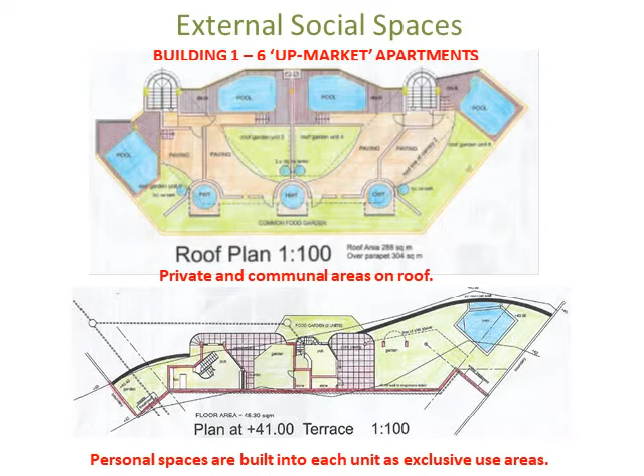If the space is there, it can be used. If the space isn't there and it's not designed in, it can never happen.

Looking at building number 2, 44 apartments, there are opportunities to do the same thing. This layout is maybe just designed for privacy and access for each of the units, but there's a small external planting area which is a private area, more to do with self-sufficiency in food, and that's dealt with in another video. This is a fairly standard layout, just designed to suit this particular development.

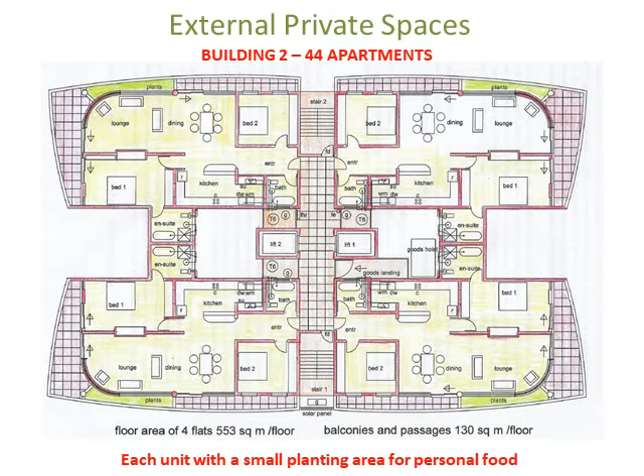But what opportunities are there in a block like this? There's plenty of opportunity. This block could have a complete floor that's just a communal floor, like a hotel lounge situation where people get to come down and interact with one another.

It could have an external space, an open veranda type space where people can go and sit, areas to catch the morning sun and the evening sun, quiet areas with a library and internet facilities, and social areas where people can sit around and chat, meet one another.

Putting that one extra floor in on a 13-14 story building costs some money, but this is what's necessary to achieve that goal, that objective, because without it, it's just another block of flats.

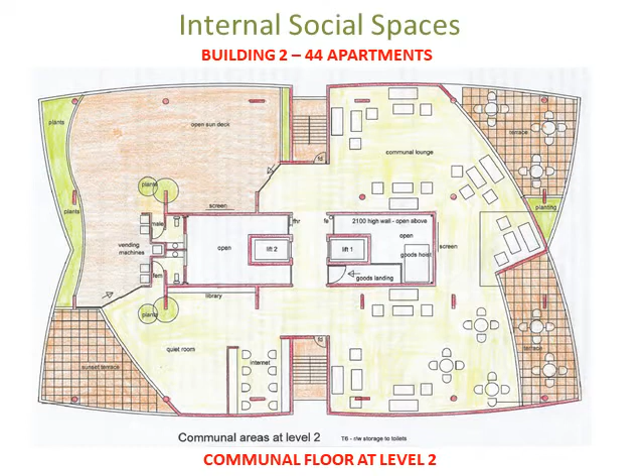Again, the roof area becomes an important area of opportunity. In this case we've got a creche where people come with their children, where the children can be taken care of while they're away, for security and safety, and also where people can meet.

There's a communal gym on the inside for people where they can come and interact with each other. That area of the site, with all the parking at the bottom, might not be conducive to having an outside gym, but there's no reason why you can't provide that facility on the inside.

Then there's a large open area where people can just get together and meet, with planting areas or a braai area, some communal toilet facilities and so on. The roof area becomes important and must be looked at as a social space, not as a covering for the building. It's a different concept.

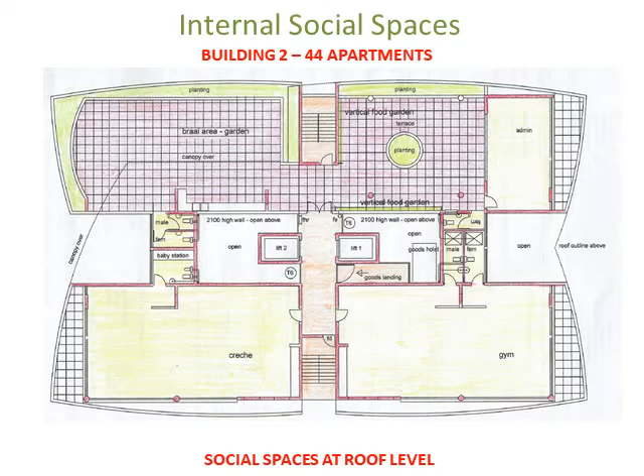Looking at building 3, a subsidized building for low income owners, the roof space is the same. It's got great opportunity for a gym, a playground area for children, a creche, an open leisure garden, and a laundry where people can use it not only for function but also for getting together and interaction.

In the body of the building itself, at each floor, in the core space of the building where people from both areas will come to, there can be a communal center there, a communal building that can be used by all of the owners.

That could be at every level, and that space can be designed specifically for purposes decided by all of those owners together.

This building would have 48 flats, 8 flats per floor, 6 floors, and 3 or 4 communal areas built right into the structure in a convenient place. There's nothing to stop this from happening.

The only thing that prohibits it now is budgetary and financial, because developers want profit and they're not really interested in that in the long term. They build it, take the money and move on. It's not about that anymore. It can't be about that anymore.

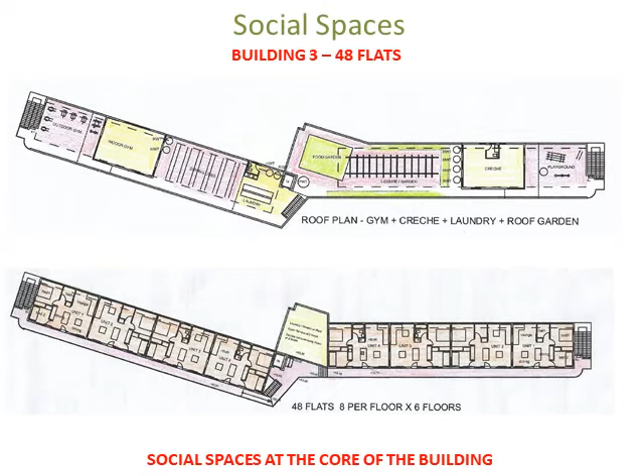A larger view at that core area shows it could be on the roof. There's your laundry and your roof garden. As you come down the building, there could be two levels with open terraces where people could come and sit and enjoy an open space, looking out over the view, and maybe two double volume areas for community rooms at different levels. It can be designed to suit the overall function of the building. But these spaces are accessible to all the owners in the building.

And in this instance, for the low-income building, I would say that rentals shouldn't be permitted in that building, just for owners, because we know what happens with tenants. Tenants come, they don't respect these kind of spaces. So this is about developing a quality of life for the people that own these buildings.

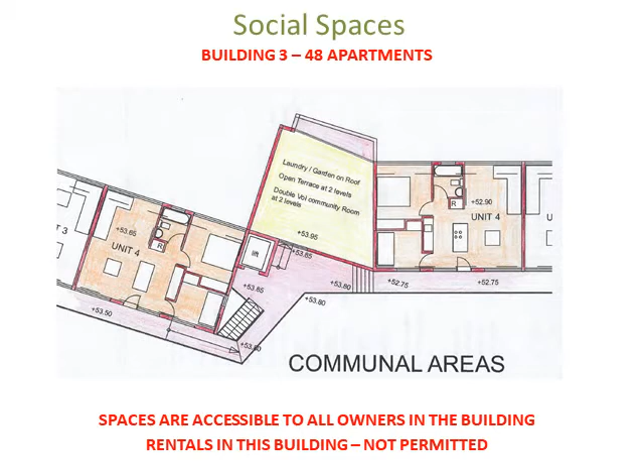Then we have building number 4, an 8-unit. I like the idea of it being a shelter for abused women with small children. There's a huge call for that kind of thing around the country. Why not provide it in a very nice environment? In that building, you've got a designated built area which has a purpose for common usage.

At the lower level, the first floor level, this utility room could be common usage, not just for the people using the shelter, but for the other people on the property as well. There could be space for a physio, a couple of therapy rooms, and a library, where people can come and get those things that they would normally go out and have to pay for, the medical stuff. There's nothing wrong with providing this right here within the project community itself.

And this facility at this level would be for all owners within the concept, whether they're the low income, the middle income, or the people that own the luxury building. They all have problems, you know.

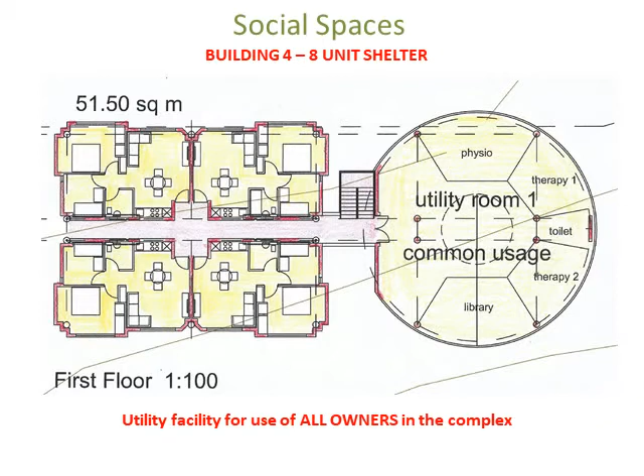The second story of that building again has the units for the shelter and the security, and the utility room there would be reserved for those people using the shelter, not for use by anybody else. This is a specifically designed area for the people within the shelter, restrictive usage.

So these facilities are restricted for the occupants of the shelter only, and they provide space for personal use, which is in the little units themselves, and the utility room gives areas for group interactions and small clusters of seating for close intimate interactions, one-on-one, one-on-two, and so on. Some people like to be quiet, some like to be involved in larger groups, but in terms of recovery, therapy and rehabilitation, a space like that would be essential, and it would be very welcomed.

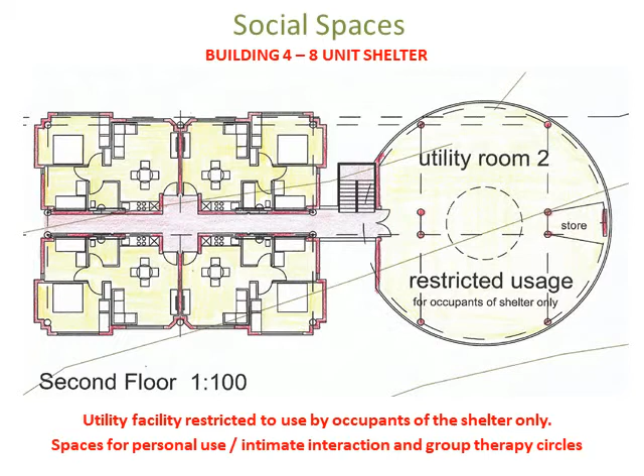Across the road on the business side, you've got social mixing just by its very nature. You've got a hotel, a casino, entertainment areas. This is where people will come and interact and mingle anyway. So there's no specific requirements needed in that event, except for the residential building that's on that site. So we'll come to that just now.

But in terms of the project, this area is important because it's a business area, and having a business activity built in a project is important because the profits of that business, a percentage of them, can be used to help and subsidize the low income parts of the other buildings, of the other parts of the project. A percentage of the profit from the business activities can go to a subsidy and development fund that's controlled by the project itself.

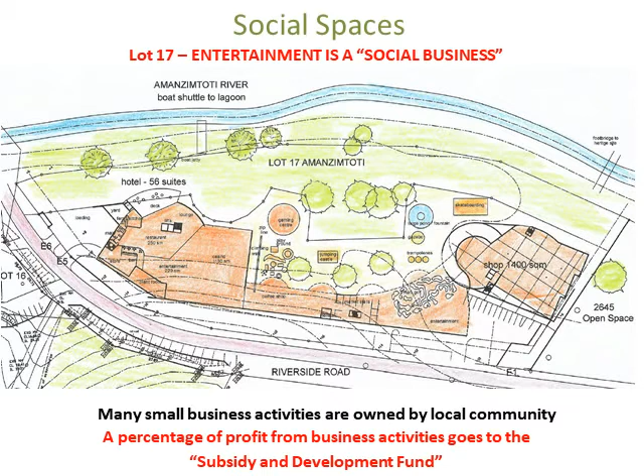The social spaces on that site are just a natural feature of its usage, and there's easy access to shopping, social, and all the public areas.

So this would give large scale interaction between the general public, residents, holiday makers, and people just coming to use the facilities. It also gives significant opportunity for permanent and seasonal employment, and opportunities for ownership of all the on-site and local support businesses that would supply that community. So the community asset ownership idea of project shares within a project is derived from integrating business and residential together.

Mixed usage is important. Social integration across all those levels. This is what's required for transformation, and inclusive design in the built environment is necessary.

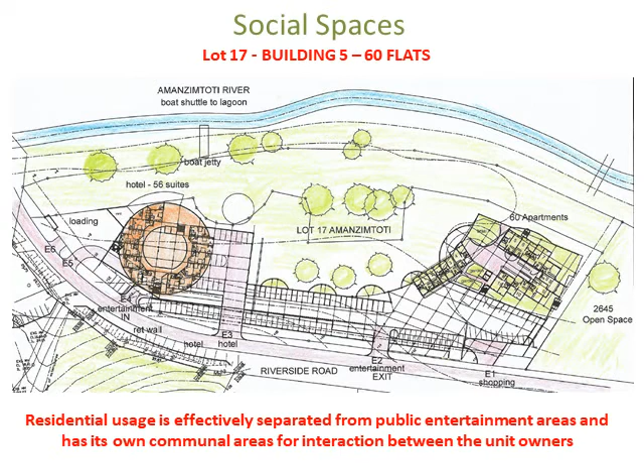The ground floor of that residential building has a large central communal core. It's not just a corridor where people go from the lift into the building. There's a circulation area where people can come, an open garden area, and a braai area looking over the river with a very nice outlook. The purpose of that area, and why it's not just a long block, is for social interaction—people coming in and out of units, and people from the upper levels coming to the braai area, mix and mingle there. It's necessary.

Residential separation from the public entertainment areas is achieved, and areas designed for interaction among owners are also achieved. This is just an example of how design can incorporate all of these necessary things. If the focus is on achieving a change of social mindset over a generation, then these kinds of areas have to be included in all buildings.

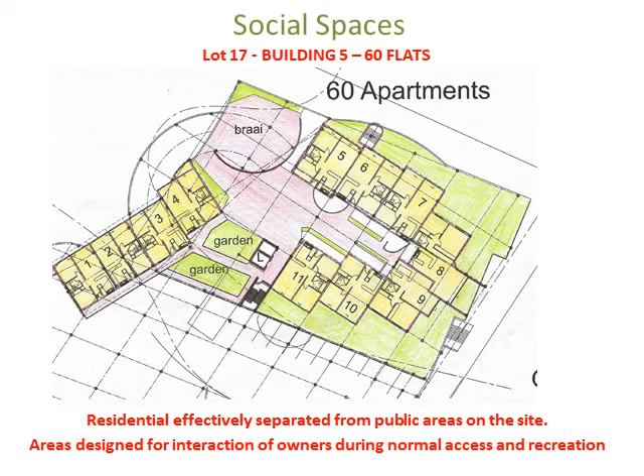Again we come to the roof area of that building, which in this case is at different levels. There's a roof garden, a common area where people can come and function, little gazebos on the roof where people can sit and mix, a play area, a creche for children with a playground, and an interaction area between the creche and playground, plus a common facility. On the upper roof you've got your food garden, and food gardens are important for sustainability of food supply—there's another video dealing with those within a complex.

There's a laundry, some accommodation for services and service people, a drying area, and space for the normal water tanks and service functions that go with this kind of building. These areas are important for social mixing, for communal function, for people getting to know each other and interacting in a way that has been legally separated in the past—and that mindset has just hung on, and it's still hanging on now, and nobody can deny that.

It can only be changed by design—by changing a person's mindset on something. It's not something you can legislate and tomorrow it changes; it doesn't work that way. It has to be done by implementation, by things working normally that end up with that result.

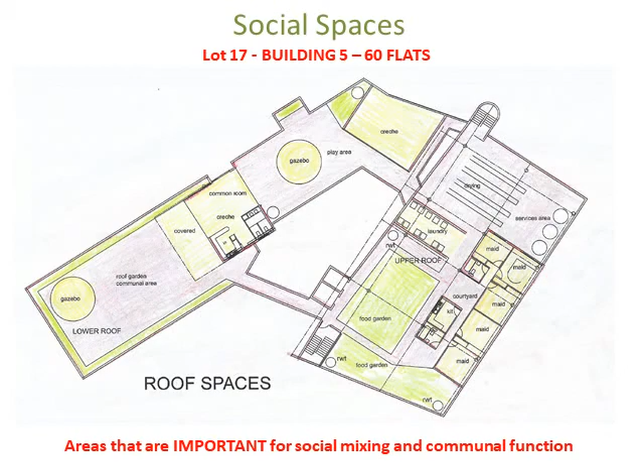Some things come out in a glaring way when you look at design for social integration: internal and external spaces for social mixing and interaction must be a priority design element in all projects. Projects must include low, medium and higher price accommodation and appropriate facilities for people socially. In many district projects within existing urban areas, it's essential to depart from the concept of mass RDP-type thinking. The thinking has to be different.

You bring it down to local district level, and there are spaces within all those areas where these kinds of things can be created. Collaborations are important—collaboration of the designers, the planners, and the government enablers. In this generation, they can mold the minds and attitudes of the next generation by providing the conducive environment that leads to that change of mindsets.